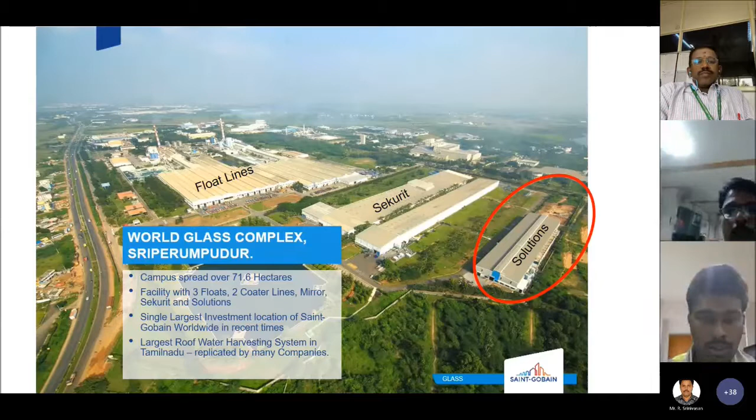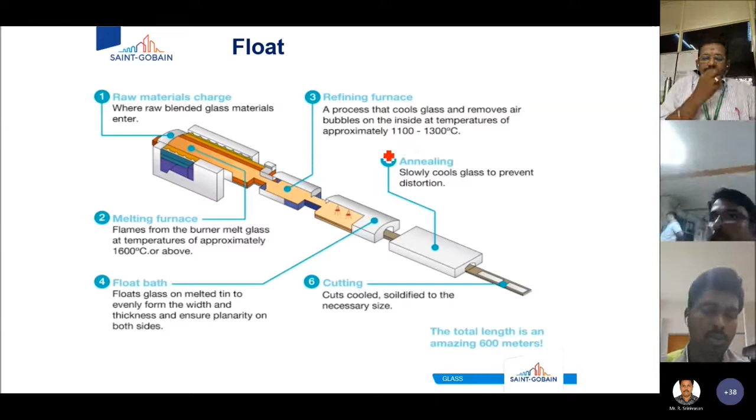After this, the raw glass is put into the furnace where melting happens. For burning we use LPG and CNG gas, generating up to 1600 degrees Celsius, where the sand melts and becomes transparent. The next step is the refining furnace, where the temperature is brought down to 1100 degrees Celsius. Because of the high temperature in the melting furnace, bubbles can form within the glass, so when we reduce the temperature gradually, the bubbles escape into the atmosphere.

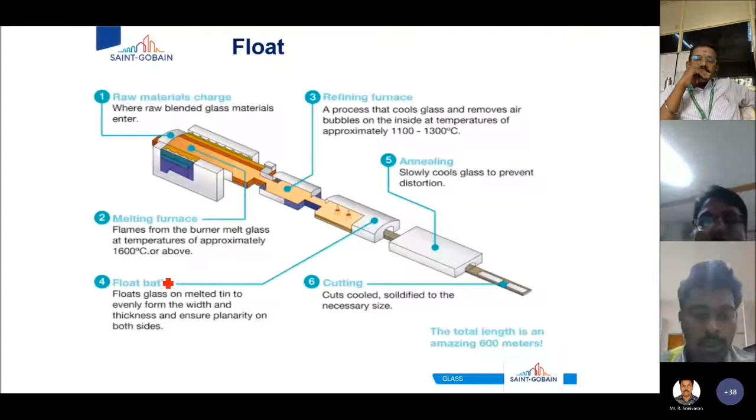So after this, there is a float bath. The name float process comes from this area. Float is nothing but this molten tin. Here we have a bed kind of thing made of tin. Tin has a boiling point of 2500 degrees Celsius, so tin is selected. So here there will be a bed of tin over which the glass will flow.

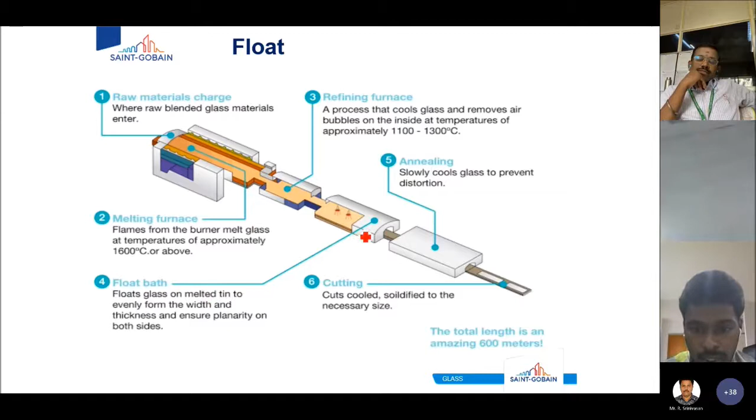The glass will come here and flow over the tin bath, so that the glass will be completely flat. The force involved is gravitational force. Due to the gravitational force, the glass tries to expand in the edge area. With the support of the tin bath at the bottom, the glass becomes flat.

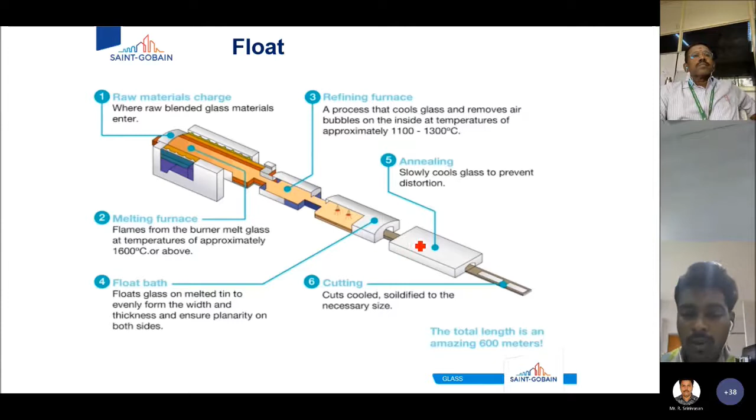After this float bath, there is the annealing lehr. Annealing is nothing but slow cooling of glass. Here the temperature would be around 1100 degrees Celsius, but in the annealing lehr it will be brought down to room temperature. This annealing layer is around 300 to 400 meters in length. In this area, the glass gets cooled.

Until cutting, the glass will be a single ribbon starting from the raw material batch. It will flow like a single ribbon from here till here. At this area, there will be automated robotic cutting machines, which cut the ribbon into customer preferred sizes. There are a few standard sizes. The maximum that we cut is 6 meters by 4 meters, which is 6100 by 4250. That is the maximum size that we cut.

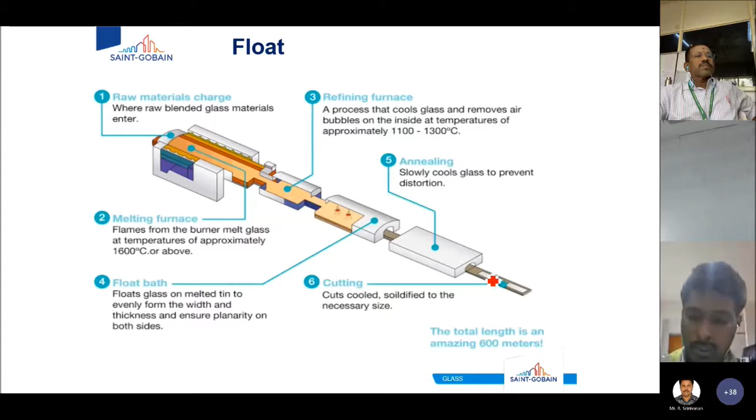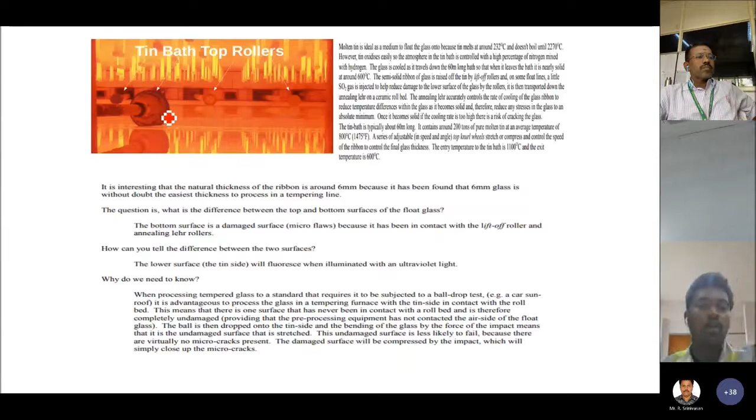And we will touch upon quality codes here and there. Guys, if you have any doubt, you can stop me then and there. I'll explain. Shall I continue? If students have any doubt, we give time in the last 10 to 15 minutes for questions. Okay, sir. Thank you.

I'll go on. The quality codes that we maintain for glass are classified into 7 types. There are wide varieties, but these 7 types are the major classifications. So I'll explain one. QC, sorry, building, coater, laminated. Okay, QC07. QC07 is the highest quality that we produce in float glass.

Where we use this glass is in car windshields. The windshield should not have any deflection, or our concentration may slip during driving. So extreme care is given to automobile windshield glasses. That comes under QC07, where we ensure to the maximum extent that no defect occurs. Even if any defect occurs, we mark it, cullet the glass and waste it. We don't use it. Likewise, there are different codes.

In the area that I work, it generally comprises QC04, which is for building applications. You can see in high-rise buildings the colored glasses, the facades, where you cannot see any structure. There will be only glass fully coated over the building. That kind of glass will be of QC04 code.

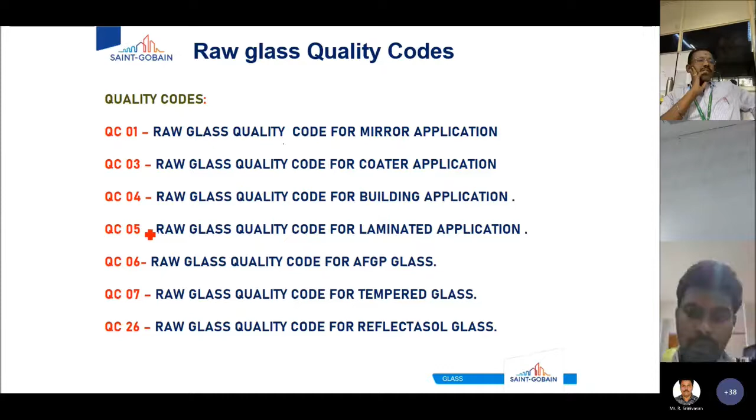In glass manufacturing, we call it a pile when the cumulative glass weighs up to 2.5 tons. Consider 6 mm glass. We'll stack up to 15 glasses to make it up to 2.5 tons, and then we'll ship it. So per pile means one shipping container. That's how we classify the quality codes.

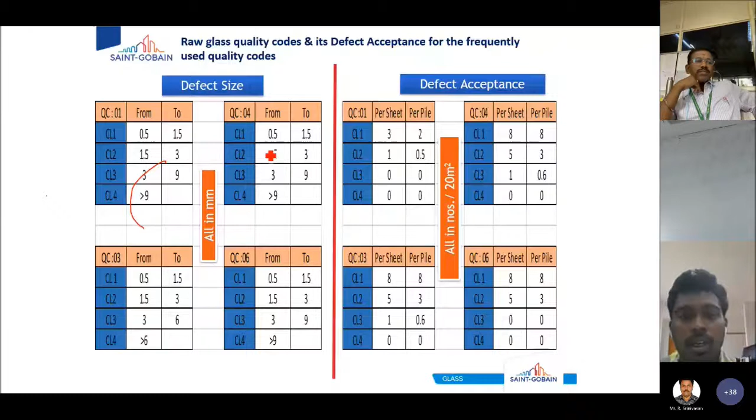In the continuous flow of ribbon, we cannot find defects manually. In a day, I believe in Saint-Gobain we make around 2,100 tons of glass. So each and every sheet cannot be inspected. There is an automated system which does all the work. We just give the decisions according to the feedback from the computer, whether to reject it or approve it.

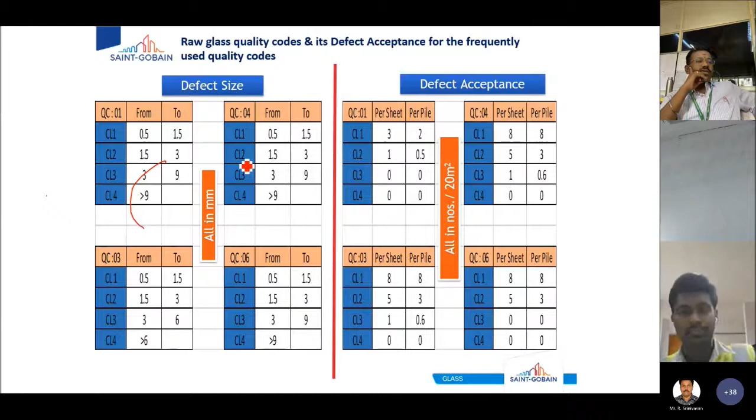So manufacturing is a small portion in glass. The major portion and big market is for processing to the customer requirements. So that's where advanced glass solution comes in. Advanced glass solution is nothing but a business unit in Saint-Gobain where we do this processing.

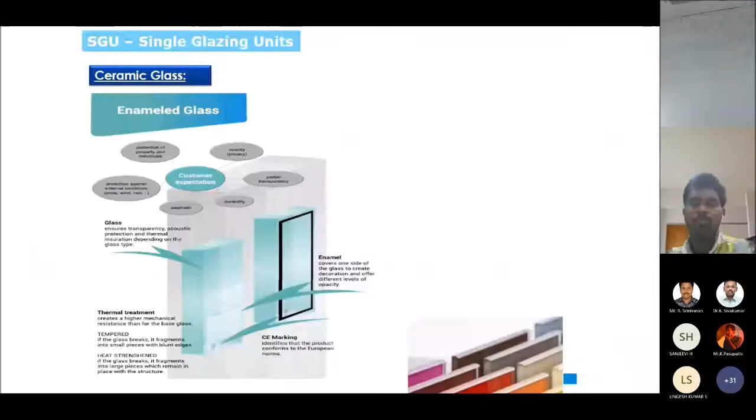Before we go into this process, I'll explain the product that we make. SGU, single glazing units. So single glazing units are nothing but single panes of glass. So this is the glass pane which is made in float. It will be like giant size. We'll cut it to the requirement, but it will be comprised of only a single pane. Such kind of glass we call as SGUs.

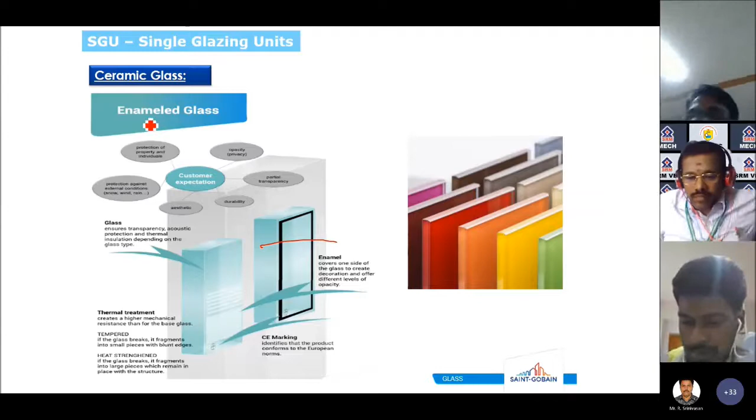Also, we have the provision to color the glass, which is called as ceramic. That's where this comes in, ceramic glass or enamel glass. So this is a niche market, not a big area. Next comes the tempered glass. This is also a single glazing unit, which is comprised of only one glass.

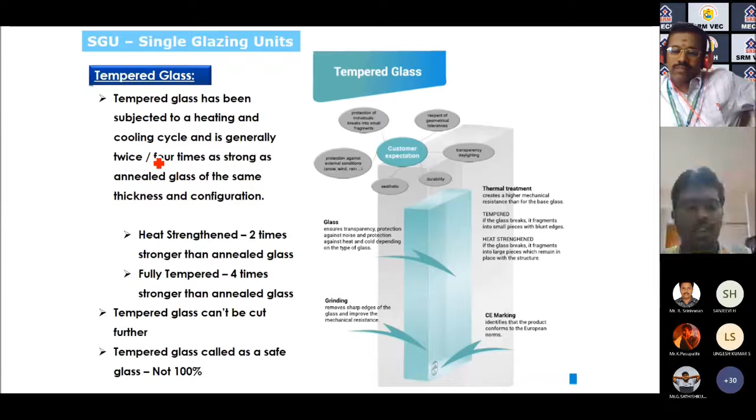So on the aesthetic front, you will not find any difference between annealed and tempered glass. But in performance, fully tempered glass will be far higher compared to annealed. So in the household, you can see dining tables and sofa sets with glasses. Those are fully tempered. We cannot use annealed glass in a household or anywhere unless it is far apart from our reach.

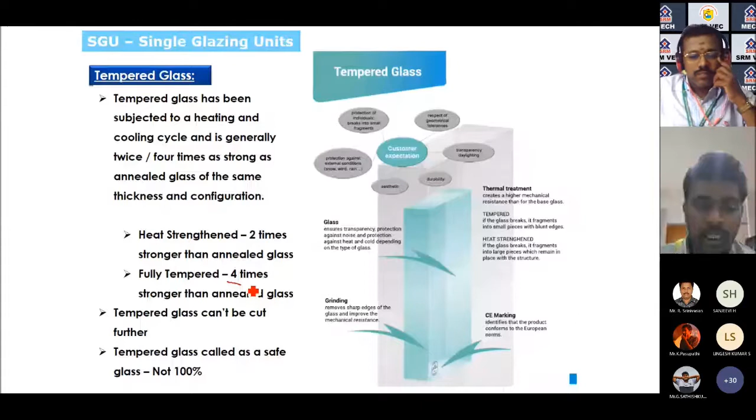So typically, when a tempered glass is broken, it will be like this. Shards, we call it shards or cullet. You could have seen this in movies where glass breaks. It will be like fine cullets.

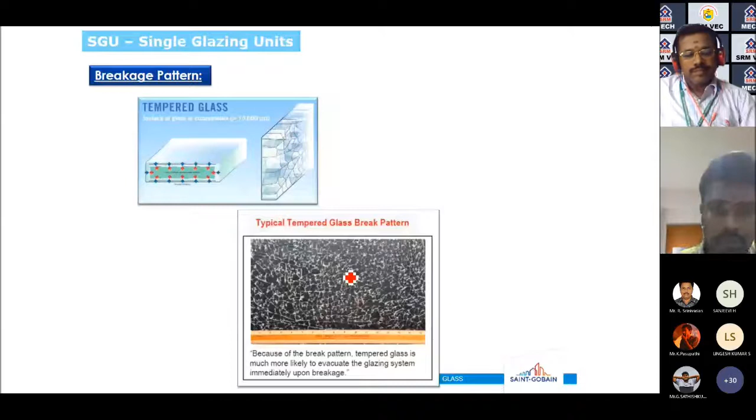So that is the breakage pattern of tempered glass. This gives the glass this strength. So this is the measurement criteria that we use. The stress should be between 69 and 120 megapascals, and the bending strength should be 120 megapascals. These are the things we make sure the glass conforms to when it is produced. If any deviation occurs, then we have to do this process again.

Next comes the IGU part. I think you'll be aware, not of the term, but of the application. Earlier, as I said, in high-rise buildings, you can see colored glasses, right? Those are fully comprised of insulated glass units. So insulated glazing is nothing but two panes of glass. Here you can see in the picture, there's one pane and another pane here. These two panes of glass are sandwiched together to form this unit.

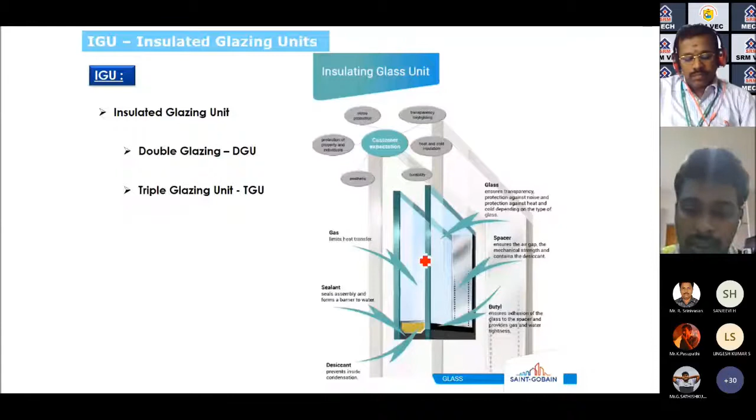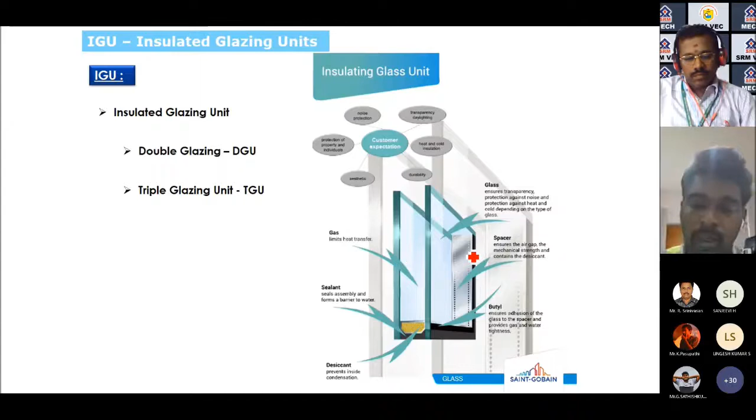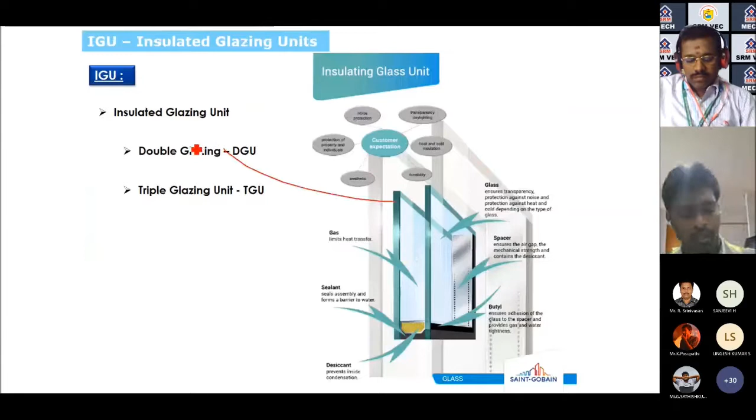To sandwich, we use spacers on the perimeter of the glass; the spacer holds the glass. Whereas in the center, it will be like a vacuum chamber with atmospheric air. Not a vacuum chamber, it will be an insulator gas. So when heat hits this pane, it will not get transmitted directly through it. Only convection can happen, not conduction. This is the main purpose of IGU. Many glass processors in India are doing this IGU process, which is very simple compared to what we do in Saint-Gobain.

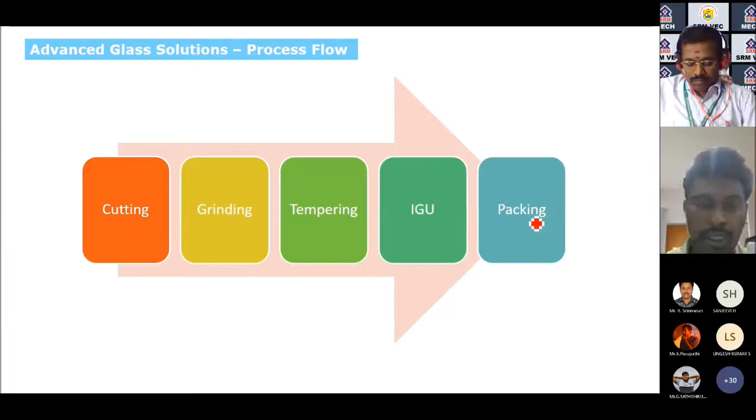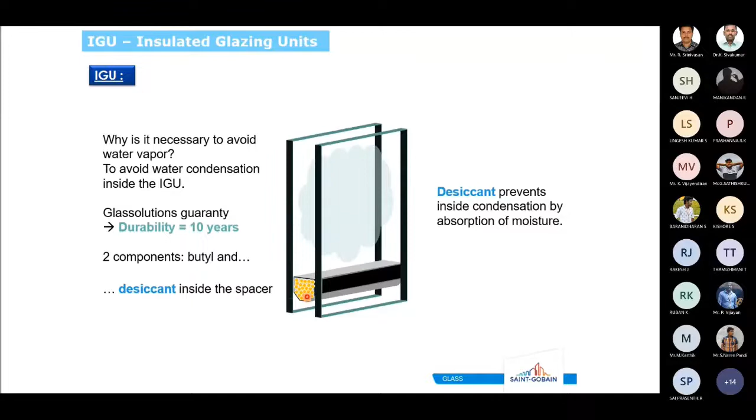So this desiccant also plays a major role. Here you can see the yellow dots. These are called desiccants. The purpose of desiccant is to absorb water. Since we are manufacturing this glass at room conditions, the gas gets trapped inside this airspace. Due to high humidity and moisture content in air, later on when this glass is exposed to cold temperature, it will create condensation. Condensation means water will form on this inner surface of the glass.

Once the water gets formed inside, there is no way we can intervene and clear it. Only the outside of the glass we can clean. That's where desiccant plays its role. What desiccant does is it absorbs this water and stores it within itself.

And after this desiccant and sticking the glass using this spacer, next comes this sealant. Sealant is applied on the edges of the glasses. This is the hot substance that holds the 2 panes of glass together.

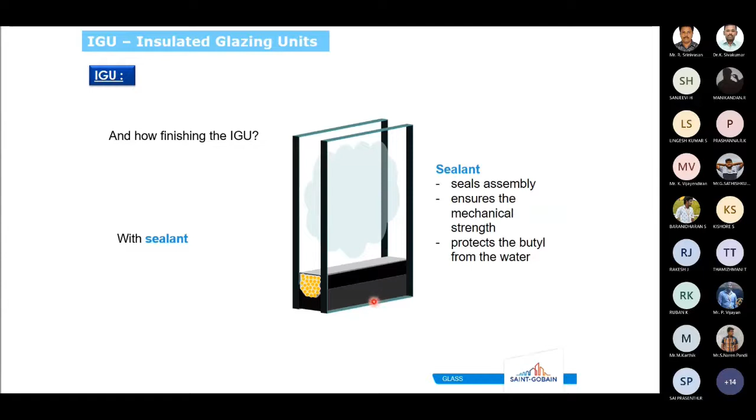In IGUs, you can generally see the edges of the glass will be black. If you get the opportunity to see any unexposed glass, you can examine the edges. With the edges, you can know whether it is IGU or a single pane or laminated. For IGUs, it will be dark black for almost 10 mm from the edges of the glass.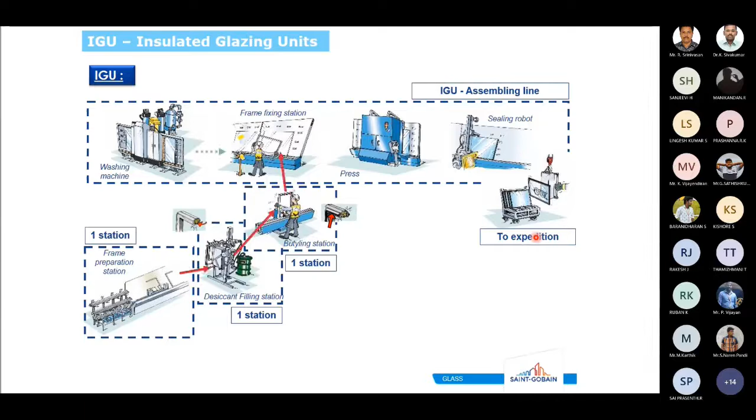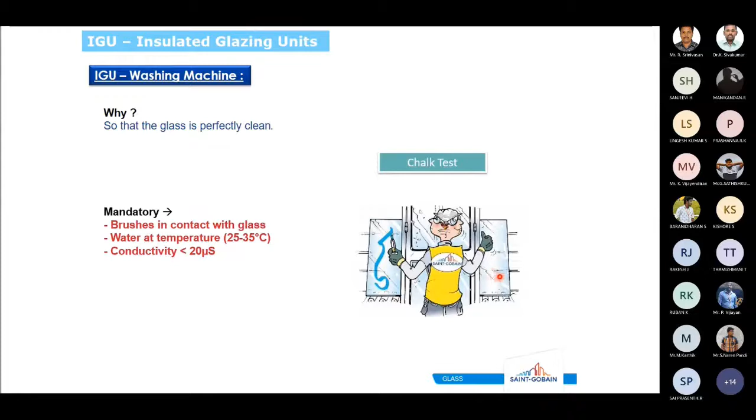For the first part, the glass is passed through the washing machine. For this washing machine to be working well, we have a quality test that we usually do, which is called the chalk test. Here you can see the operator is marking this glass with the chalk, and the glass is then passed through this washing machine, and the glass is observed to check we do not see any marking of this chalk. Once this test is passed, it is good to go.

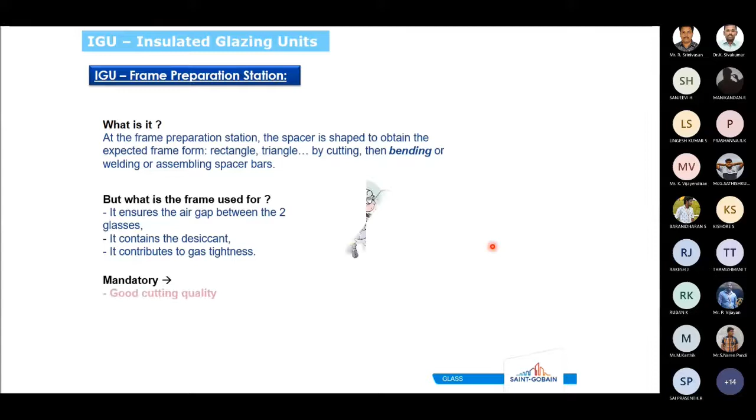And next is the frame preparation. I will show you. This is the area where the frame gets prepared in the sub-assembly line. The quality that we have to maintain in this area is good cutting quality. The frames will be cut and bent on 4 corners to make this frame. We have to make sure that the corners are not over bent, and the cutting edge is good.

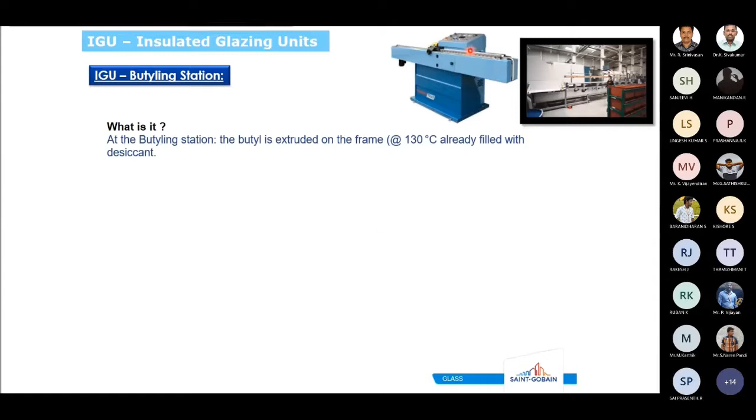This is the desiccant filling station. I've explained it earlier. The butyl application station. This is the machine that we use, the butyl applicator. Here we can see the function of butyl. If there is no proper butyl between the spacer and the glass, the air or gas that we trap inside escapes through this seal. So the hermetic seal is broken here. If it is proper, the gas inside this IGU will stay as long as this glass is glazed.

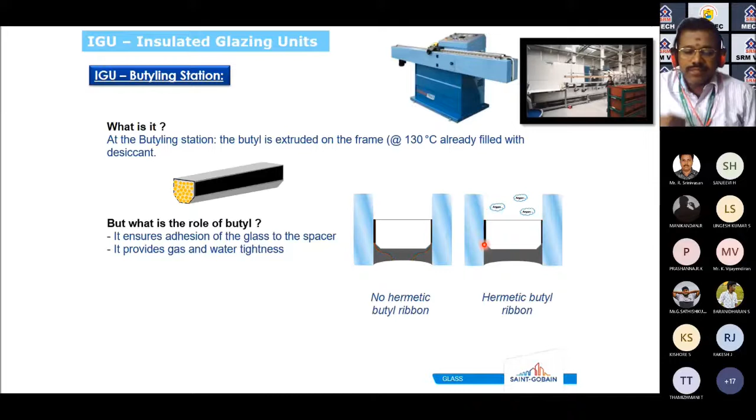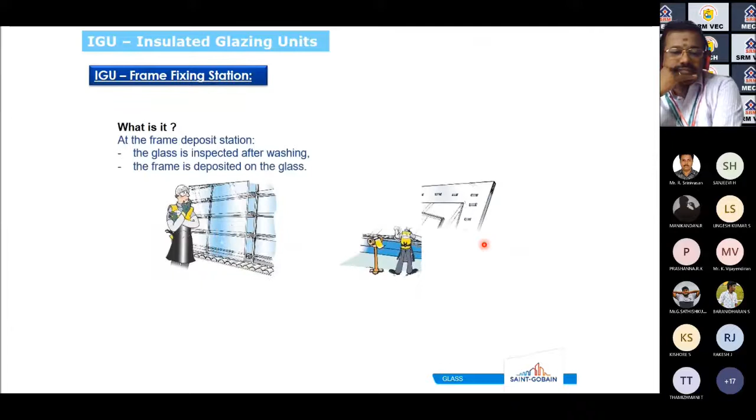This is the frame deposition area where the operator keeps the frame over the glass. This is the illustration of pressing. First, there is a glass with spacer, and second, there is a plain glass which gets pressed over it, forming a unit.

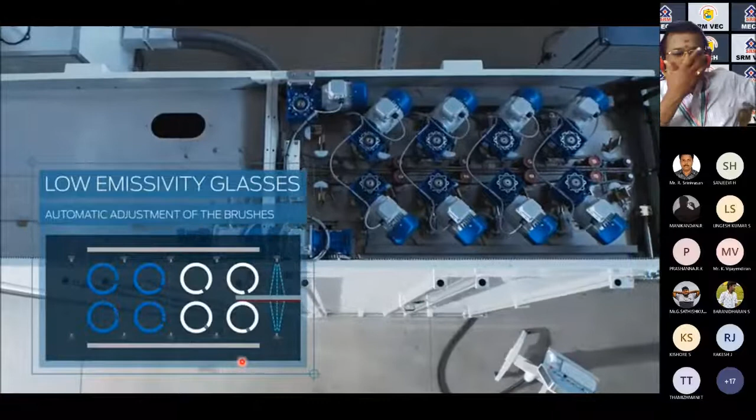Naveen? Hello, Naveen? Awesome. This unit, is it in our Sriperumbudur plant, or is this video? No, sir. This video is not taken in the Sriperumbudur plant. This is a reference video that I have taken. We are not allowed to film inside the campus, sir.

Okay. Can you arrange a virtual industry visit for our students? Is it possible? I'll check, sir. I'll check with the HR team. Within the campus itself, you go and just show it through online, through video mode. Oh, okay. Just to explain what the components are, how the material will flow in and out, what processes are going on inside the Sriperumbudur plant. If it's possible, you can arrange a virtual industrial visit, not direct.

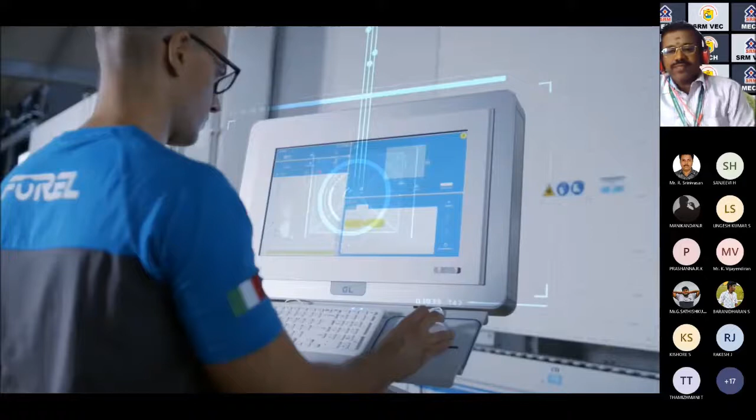Okay, okay. I get it. Yes, sir. Sure. Please make the arrangement, sir. I will check the possibility and I will let you know, sir. The time, just 1 hour or 1.5 hours, that is enough. Okay, sir. That we can do. Thank you. I'll play this video. Sure.

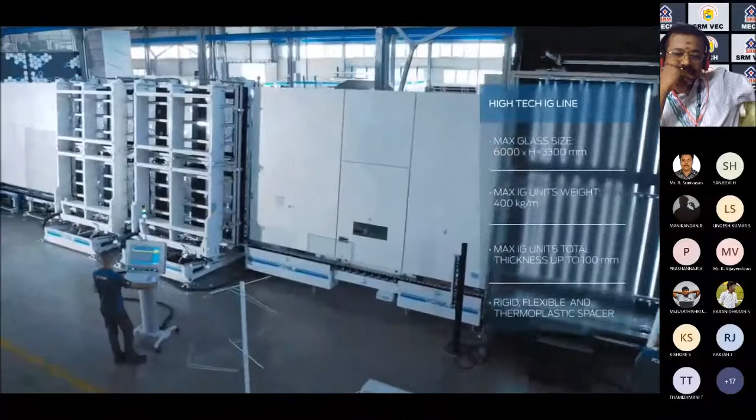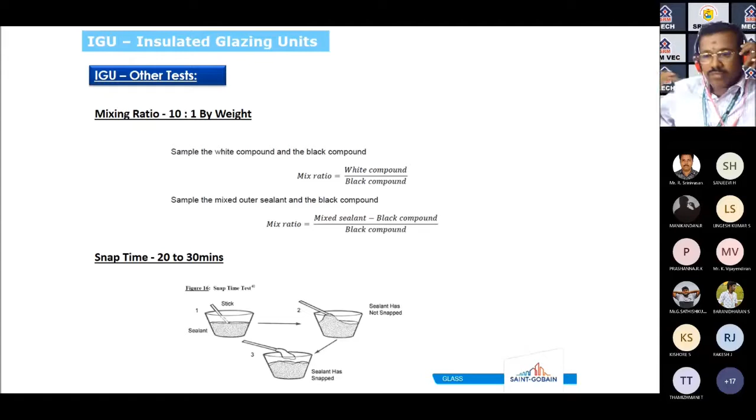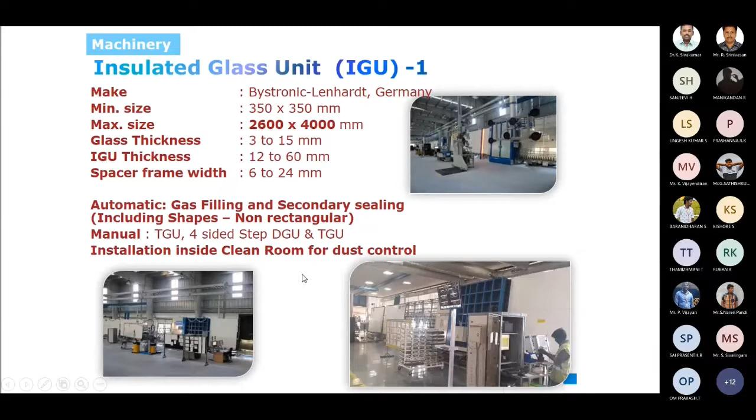Okay, the video that you saw is what we actually do for insulated glazing units, similar to it. So these are the few tests that we saw earlier, okay, not okay, and these kinds of tests should be done every shift by the quality people. So this is a photograph of our machinery. This is a jumbo line, and once the unit is finished, it looks like this. These are individual IG units with the sealing in between. This is how we label or identify the products.

So these are a few of our certifications. These are a few of our projects that we have done in recent years: Infosys Mysore, TCS Chennai, Antilia Mumbai, and Lusail Stadium Qatar. This is the stadium that's going to host the 2022 FIFA. And these are floor glasses and enamel glasses that we do. You can see people walking over the glass safely.

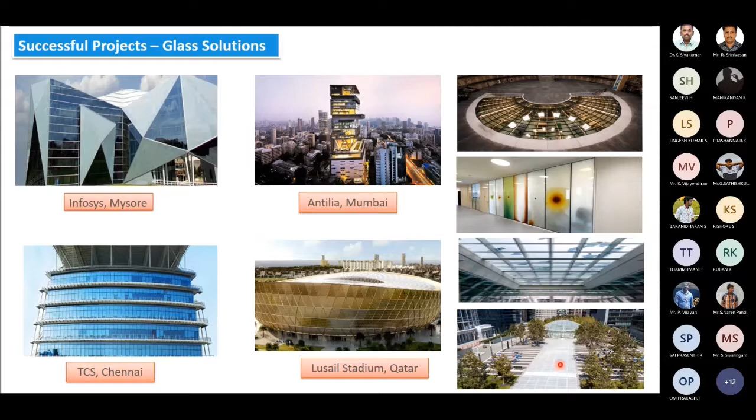And this is a railway station. This consists fully of glass. People can walk above it, and below, the metro trains come. So this is a structure that we have done. It's in the Netherlands, I think. That's it from my side.

Okay, wonderful presentation. You are showing many videos of how the glasses are manufactured. It is very excellent. Students, do you have any queries regarding this? Any doubts? Today's lecture is given by Mr. Naveen Kumar. I have only one doubt, Naveen. Yes, sir.

How are you controlling the temperature level? For different applications, you use different temperatures to make the glasses. For example, you showed a lot of applications done by your Saint Gobain sales team. If people are walking, that is floor glass. What is the temperature difference between floor glass manufacturing and normal glass manufacturing?

Okay, sir, we cannot quantify the difference in terms of temperature. The difference between floor glass and normal glass is, for floor glass, we sandwich multiple glasses, one over the other, with PVB interlayers.